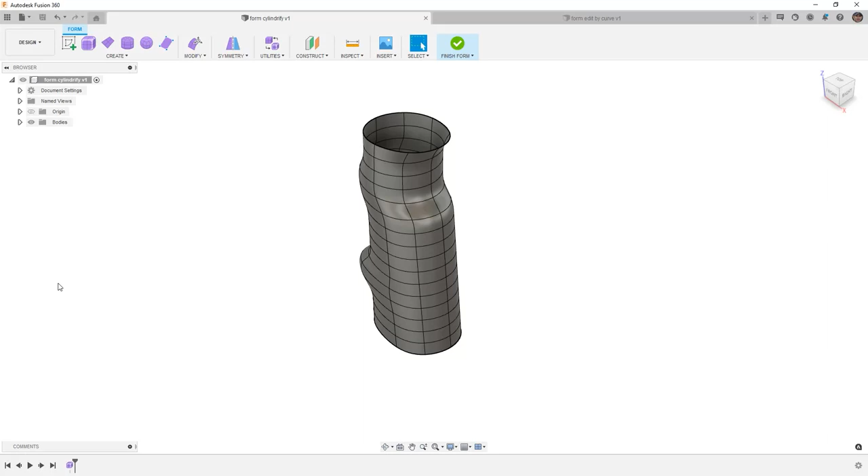In Fusion 360, let's get started with the supplied design Form Cylindrify. If we take a look at this design, you can tell that it used to be a cylinder, but there have been some modifications made. The modifications often happen by using Edit Form and making adjustments to the geometry.

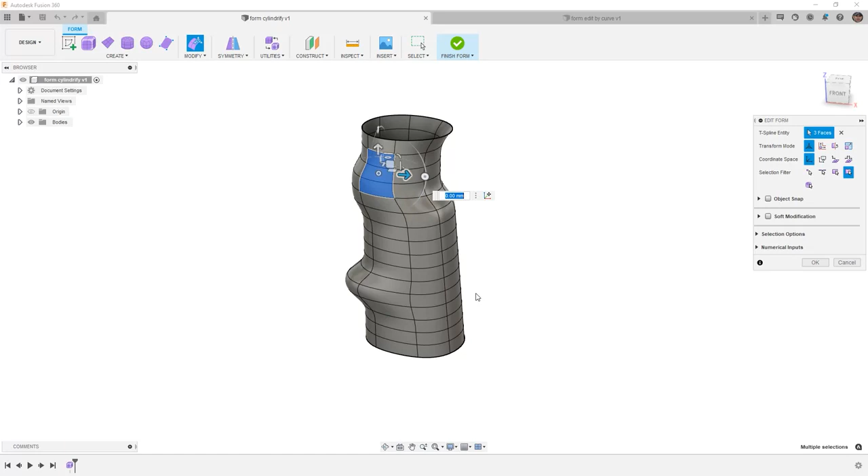For example, if we select some of these faces by holding down Control or Command, then we use the Alt key, which will allow us to make an extrusion. Changes like that oftentimes are going to be very difficult for us to go back and smooth out without using some advanced techniques. So to get started on this example, we want to explore two different tools that are extremely handy whenever you're working with generative design outcomes.

We're going to be taking a look at Erase and Fill, and we also want to look at the Cylindrify tool. Let's start by looking at Erase and Fill.

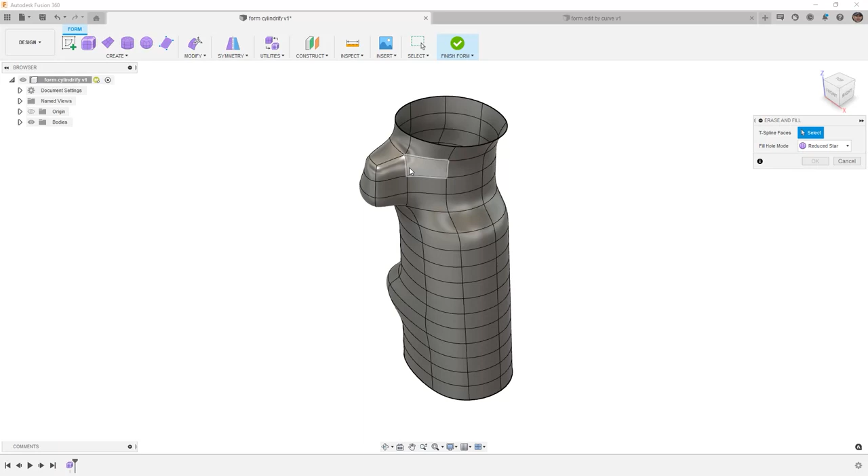First, let's note that we need to select the faces that we want to remove. To do this, we'll have to rotate the body around and select all the faces on the body that we want to get rid of. These are going to be all the ones that were created from that extrude.

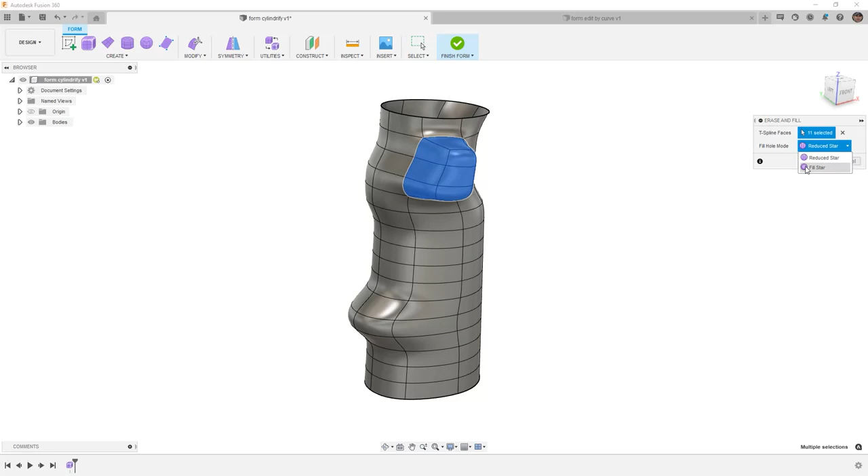Then we have a couple different methods that we should talk about: Reduced Star and Fill Star. These two options are going to create a patch or a fill in this area in different ways. The reduce option is probably going to be the best option based on the surrounding geometry. The fill option generally will have a patch in the center, and then it'll create lines or edges from all the surrounding vertices. So let's try the reduce option and say OK.

You can see here that it was able to quickly and easily patch the surrounding geometry. I won't say that this always works. In some cases with more complicated geometry, especially if the number of sides on your specific patches is more or less than 4, it can have trouble. But it is a great tool to explore, and remember that you always have undo and redo.

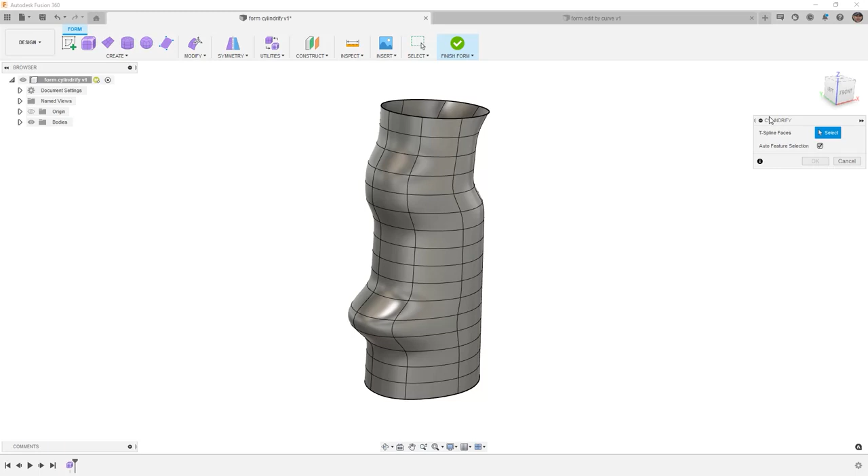Next, let's take a look at Modify, and let's go down to Cylindrify. While this is a basic example that was created just to show the tool, Cylindrify is extremely helpful whenever you're working with generative design outcomes. It can really help you smooth out some of the different areas that are created in the generative design process.

To do this, I'm going to use a box selection, and I'm going to select all the faces with the exception of the upper two. Let's note that as we do this, it does create more of a cylindrical result, but notice that the edges are not smooth.

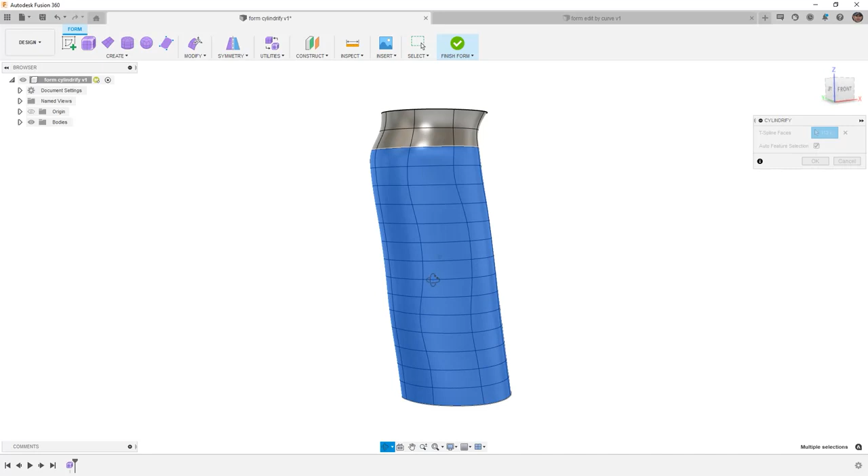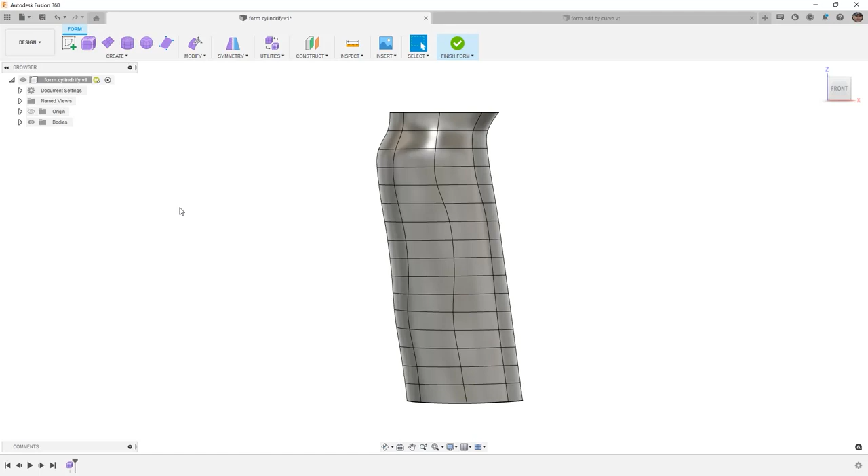Everything's okay, but it does help us understand what this tool does. Because the back side of this design was originally tapered, it automatically took our selections and it tried to average them to create a cylinder. If this backside wasn't pushed out so far, we'd likely get a more cylindrical result. But again, it's important to understand what the tool does so we can better prepare to use it on our own designs. For this example, let's go ahead and save this before moving on.